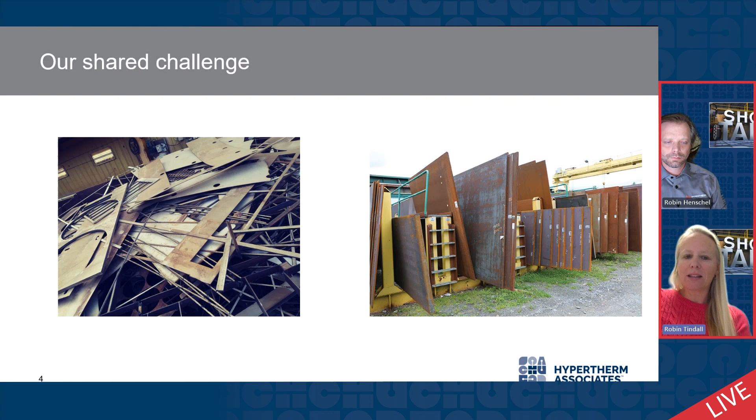So in our data that we've looked at from millions of nests over thousands of customers, what we've seen is that 42% of nests, which is quite a lot, achieve less than 70% utilization. So we've realized that that's a problem. And to understand why that happens and what we can do about it, I've just drawn this simple diagram.

So first you have raw materials and you pay a certain price for those. And what you do with those raw materials is you put them through your process. Some think of it as a black box. Part of that process is your Hypertherm products that you might be using to cut or process that material. But it's also your ingenuity, your designs, your innovations, your process. It's your revenue generating machine. It's like your value creation magic.

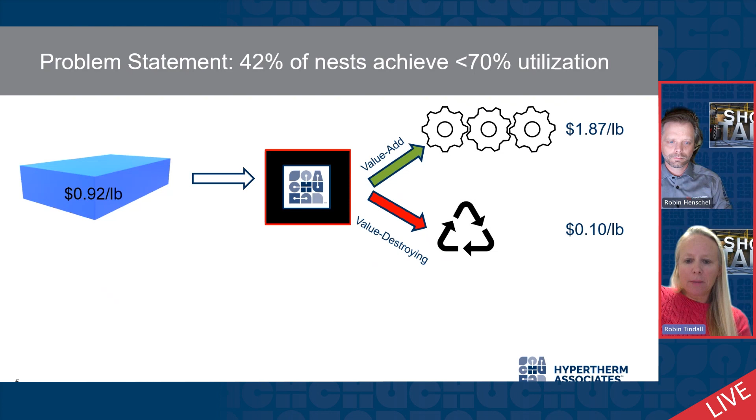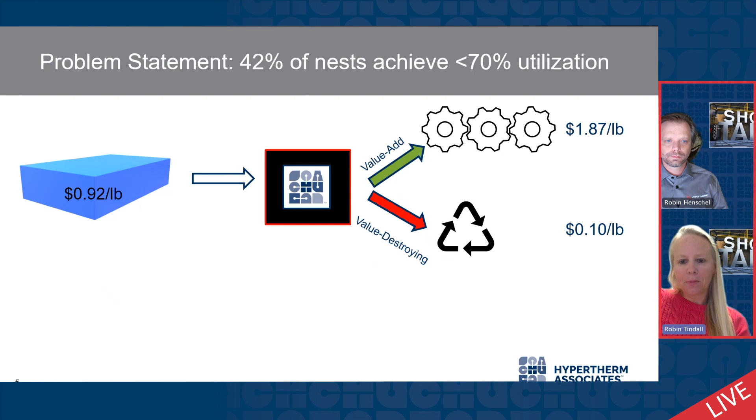So yes, your process creates value because you're generating revenue. You're creating much more value than what you put into it. But at the same time, you're in a way destroying value because you're making scrap. Scrap is pure waste. You're taking a raw material that you paid for, you're adding labor that you paid for, and you're getting something worth much, much less, and that is scrap. So really, that's a value destroying process.

So let's walk through an example of how you might improve. If you have throughput of 1 million pounds per year of material and you're at 70% utilization, you might have a certain revenue there that we've based on certain assumptions. And if you increase that utilization to 75%, your revenue could increase by 40%. And if you start out even worse at 60% utilization and move to 65, your revenue is going to increase even more.

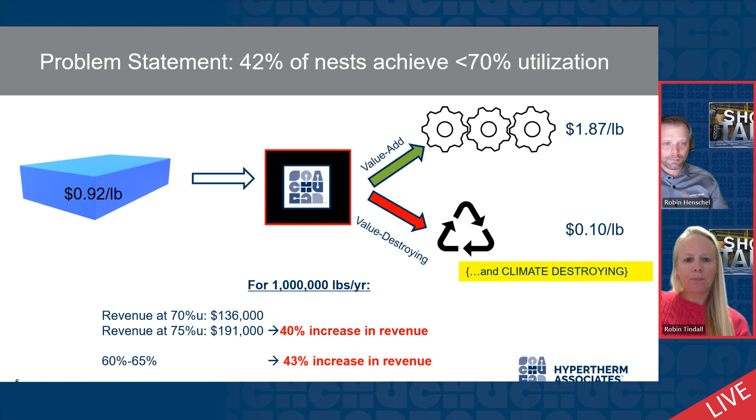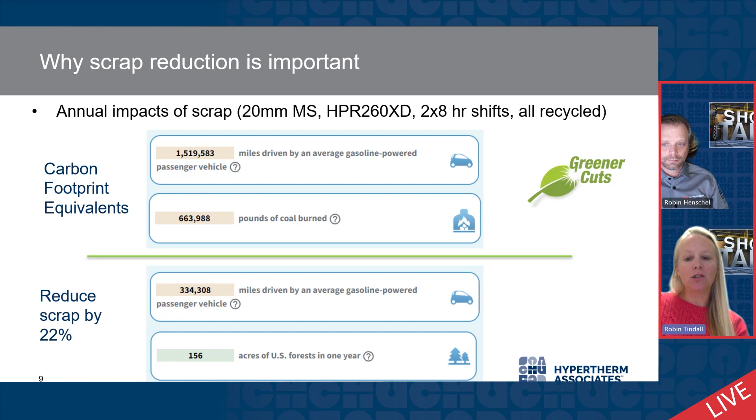So with that, I'm going to hand the presentation over to Robin Henschel, and he will review some of the techniques you can use to reduce your environmental impacts and increase your profits. Okay, thank you, Robin, and you showed some really interesting and big numbers there.

And I now just hope that I can keep up with these impressive numbers during my presentation.

So what can we do from our ProNest software with measuring the utilization? In our ProNest database, we have a bunch of data stored, and among the available data there, we have, of course, information on the plates that we have used to cut all of the jobs that we have created with ProNest. Among this data is the material length, width, thickness, and all of these.

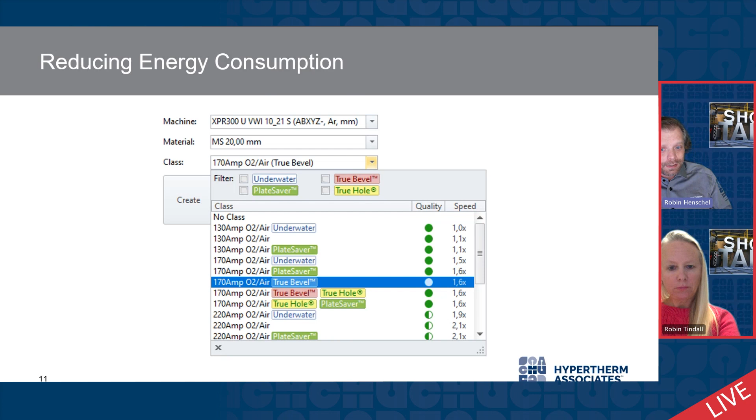Well, even when you go down on your amperage, we have some ways to decrease the production time of your nests. One of these things that we can use is our collision avoidance module. I know the name sounds a little bit different. The main thing of the collision avoidance module is to avoid collisions of the torch with parts that may tip up during the cutting. To achieve this goal, ProNest is recalculating every single cutting path, looking at the torch traverses and optimizing everything.

Due to this optimization, on a simple nest like this one, without the collision avoidance, we have a production time of, let's say, 1 hour and 33 minutes. And when we now just activate the collision avoidance module in ProNest, we go down in the production time to 1 hour and let's call it 3 minutes. So it's a reduction of 33% of production time. This is also a saving of energy. And when we combine this with a different cutting class, okay, our saving in production time might not be that much, but we are saving the energy on the cutting class.

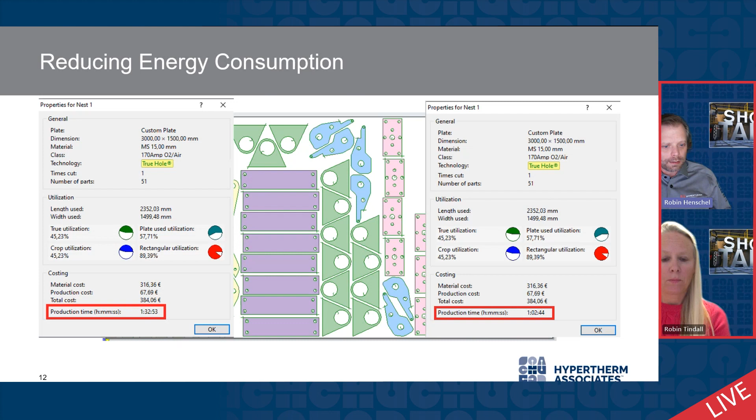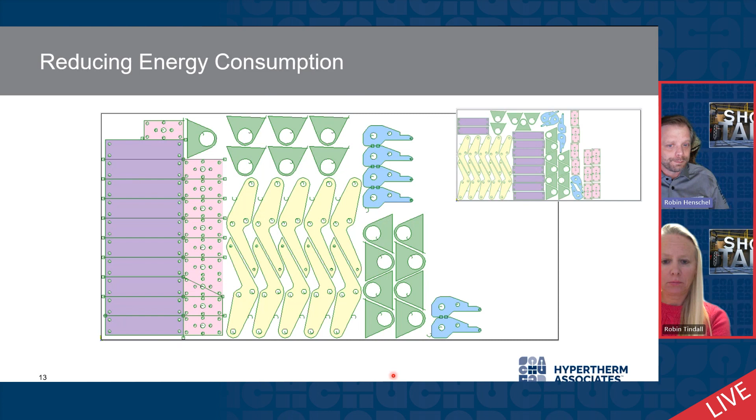But what is the real impact? Without the common line cutting, as said before, we have a production time of 1 hour and 3 minutes, and we are using, let's say, 58% of this plate. With the common line cutting, we are now going down to a production time of 59 minutes. So again, 3 minutes saved. And we are just using 54% of the plate. So we have already increased our utilization of this plate. So we are now coming from the energy savings to the increased utilization on the plate.

The common line cutting is just a small tool that we can use to increase the utilization of the plate. And as said, the cut quality, you must be aware that on the common line cutting you have one good and one bad side. This is the physics of the plasma.

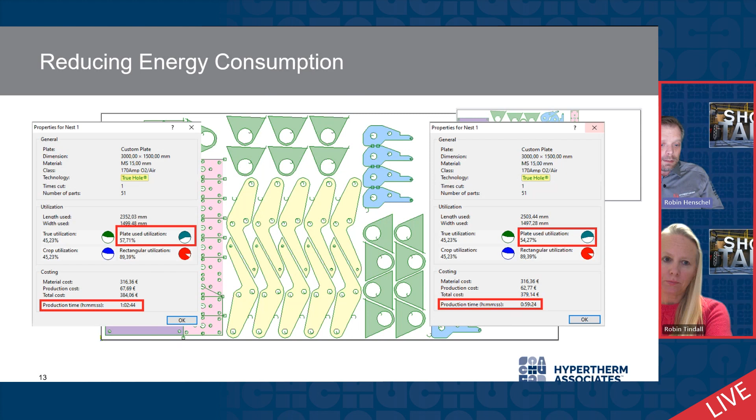Another thing that we can use to increase the plate utilization is the plate saver. The plate saver you can use together with our Hypertherm XPR power source. And with the plate saver, we are utilizing a special lead-in to reduce the lead-in size. Here we have an example of a standard lead-in on, I think this was a 15 millimeter mild steel. This is what you have on the standard settings, the separation between the parts with the standard leads.

When we now just activate the plate saver, we see that the size of the skeleton is way smaller. And of course, this is immediately increasing our utilization on the plate. One thing to mention on the plate saver is that this is only available with the XPR power source and on mild steel on a thickness between 12 millimeter and 30 millimeter.

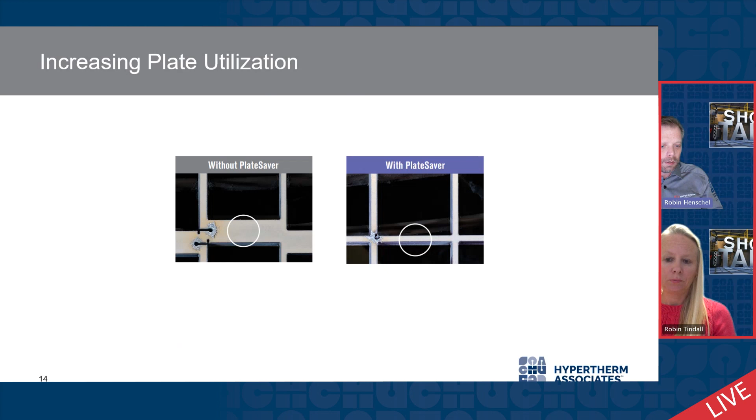If you want to use the plate saver for a nest, how to do it? Well, it's quite easy. When you are selecting the cutting class, just look for a cutting class where the plate saver is in the name of the cutting class, and then all of the settings will be applied automatically.

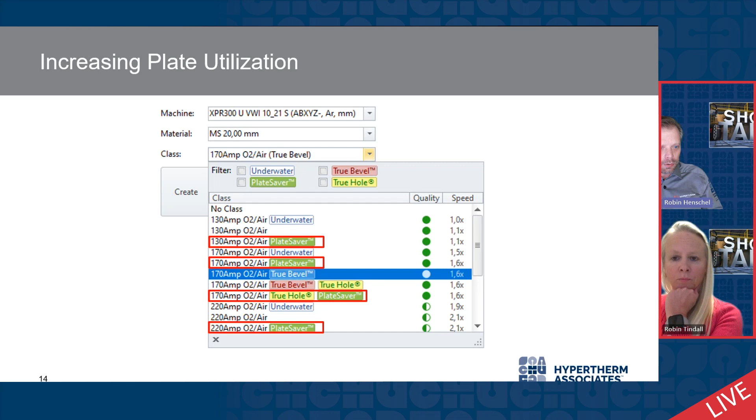So now let's go to a real example. We have now selected the plate saver cutting class. ProNest has enabled now the special lead that we have for the plate saver. We do here a moving piercing, so we lower the torch while we are doing the piercing. This helps us to stabilize the arc in this short lead.

When we now do a nest of these rectangular parts, this is a thickness of 15 millimeter. The plate dimension is 2.4 by 1.2 meters. With the standard cutting class, we have here now 34 parts nested on this single plate. When we look at this one now, we say, yes, it's quite a good nest. There is not much room to add any additional part, right?

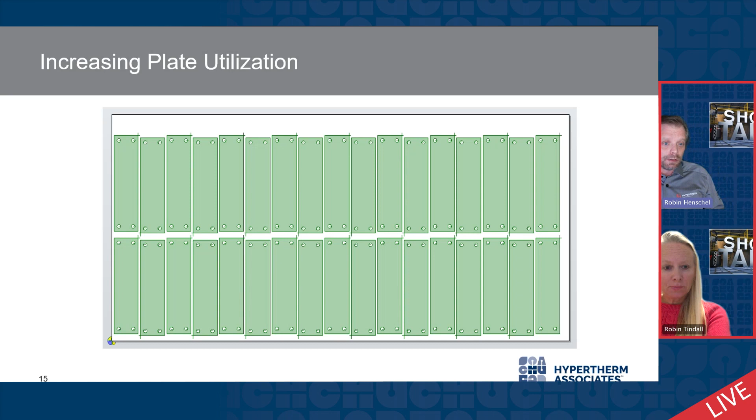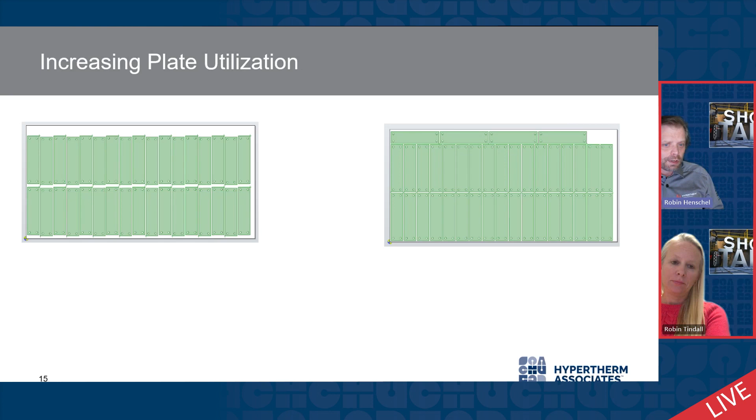Well, when we now activate the plate saver cutting class, it looks like this: same parts, same plate dimensions, but we have 4 additional parts on this plate. Instead of 34 parts, we have now 38 parts. We can compare these two now, and let's have a look at the utilization. Without the plate saver, we are at 83% of utilization. With the plate saver, we are at 90%. So it's a big increase of 7%.

Of course, I have to mention that these 7%, you will not get all of the time. When you are just cutting these kind of rectangular parts, you will see them. If you are also cutting round parts, for example, the saving will not be that high. And we have measured an average increase of 3% on a nest, just depending on the parts that you are cutting.

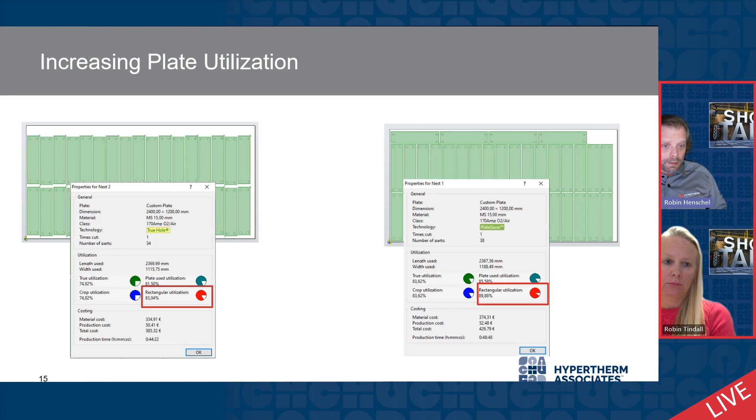Another thing that I like to mention on the plate saver: as we are doing a moving piercing, we will create a big splash of material during the piercing. ProNest is indicating in which direction this splash is going. And please do not look at the size of this triangle. This is just a symbol. The real splash might be way bigger.

In case you have an operator standing here, you can define in ProNest that there should be no splash to one or up to 3 sides of the plate. Then ProNest will just direct the splash into the sides that we allow.

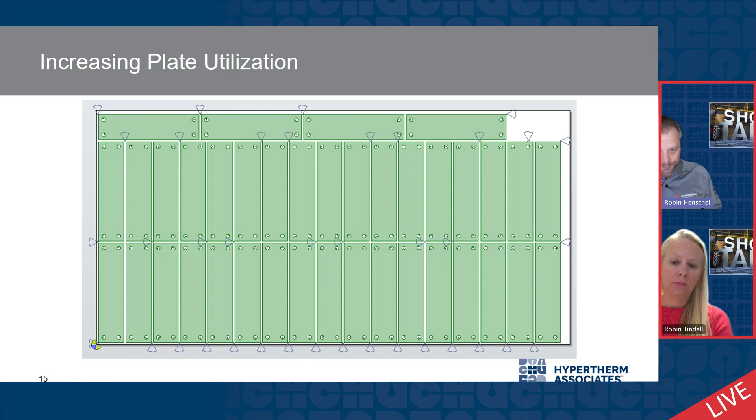Okay, so now we do not always have so many parts to fill a whole plate. Sometimes we just create a nest like this. And now what should we do with the rest? In ProNest, we can easily create a crop cut to this plate, and ProNest will cut off the rest of the plate. We can define in the settings how this crop cut should look. Should it just be a straight cut? Should it be an L-shaped cut or a profile cut like we see here?

And also we can define the minimum width and length of a remnant. So in my settings, I said something like this is just too small. I don't want to have this in my stock as I won't be able to use it, but this can be set in the settings.

The remnants that we create here can go into the plate inventory within ProNest, and we can store all of the remnants there with their actual shape for later usage. So if you are cutting a lot of nests each and every day, your plate inventory might look like mine here, with a lot of remnants in there.

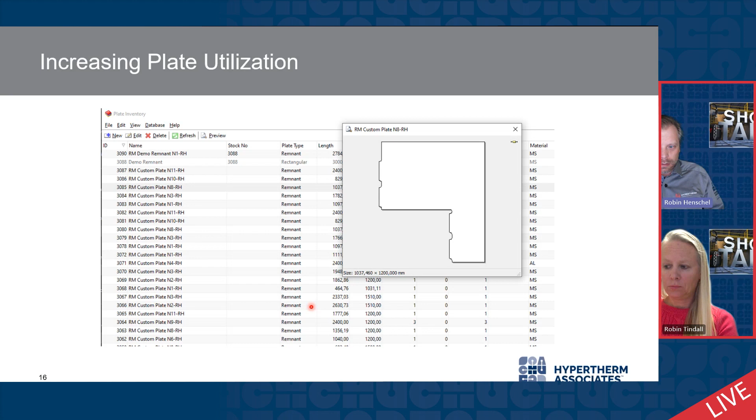Now, what remnant is the best to use for the nest that you are cutting at the moment? We have a module called Nesting System Optimization that can help you with this. It's a quite powerful module, so we have a bunch of settings that we need to do. Let's just go quickly over the settings.

One of the settings is what nesting strategies should be tried during the run of the module. Should this module just look for one plate size for all of the nests in this job, or should it always look for the best plate for each and every nest within this job?

One of the interesting things is we can also tell this module that it should include the material costs into its calculations. So we can say a remnant from our side is always cheaper to use than a new plate, as we want to have a turnover in our stock, and we don't necessarily want to use a new plate. We want first to use our remnants that we have on stock. As Robin said before, there's nothing more expensive than having remnants on stock that are not used - this scrap that is just laying around.

When we have done all of these settings, ProNest will start running through all of the possible plates with all of the strategies that we have selected. We see here a total of 125 trials are done. At the moment, it is at trial number 3, and the best utilization found is 45%.

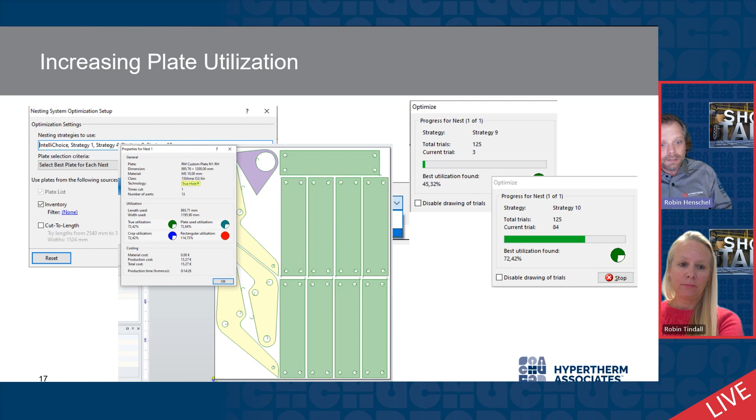Okay, maybe these savings are not more than a water drop on a hot stone, but when we think about it, even the Grand Canyon exists because of a single water drop which started the process. So let's think about what we could do to not even create a remnant.

We have a module called Production Manager. This shows you a lot of data on all of the nests that you have already cut - for example, if it's in production at the moment, is it pending, or is it already a finished cut. It also gives you information on the material that is used, on the plate size, and on the available free space on this plate.

I go into the nest, I look up which ProNest job this one is, and I remove the output from the plates to cut so that no operator can now cut this job while I am modifying it. I go now to ProNest to modify my job.